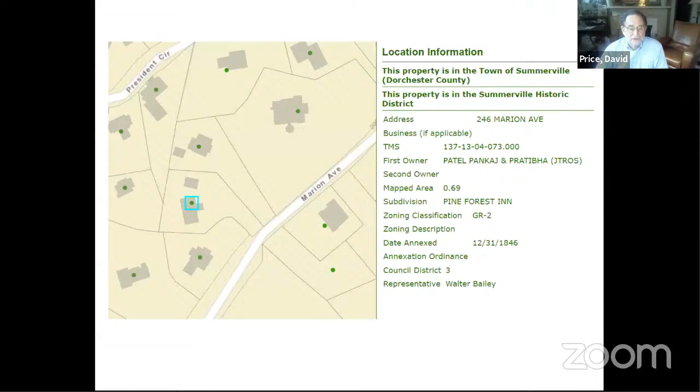All right, the first project is 246 Marion Avenue. We have someone here to make a presentation on that proposal. Yes sir, my name is Mike Taylor. I'm representing the Patels with this project.

Go ahead and tell us about the project, please. Okay, we've got an existing house off of Marion Avenue and we're looking to build an addition off the back.

One part of the addition is going to extend their dining room, and there's going to be a sunroom that'll extend off the back of that. So that's kind of the inside of it.

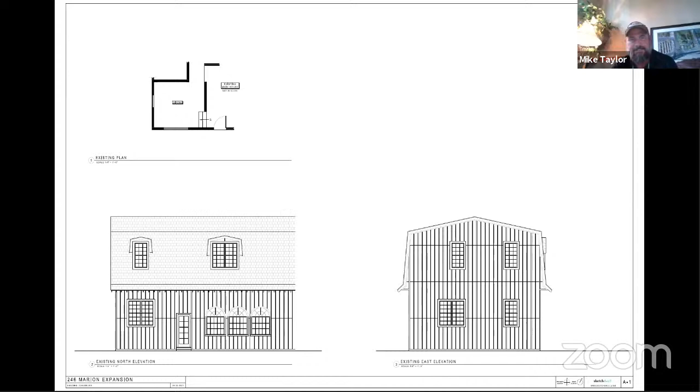The outside is going to match the house with the board and batten. It's just pine board that has been sealed, not painted. There'll be quite a few windows in the sunroom, but they're going to match the existing house, which are vinyl windows. The eaves and everything we're going to match with the exposed rafter tails.

And we have a deck going on there as well. We were looking to do some cable railing around the deck. It was going to be an Ipe deck, and then we were going to also wrap the columns with the Ipe as well.

So the roof, we're going to match the existing roof, so really it should look like it's always been there.

As far as being able to see this, it sits really, really far off the road. I don't know if there was an included plat of the property, but this is at the very back, and it sits way off the road. There's a long driveway. So it really can't be seen from the street at all with the positioning of the house and the garage.

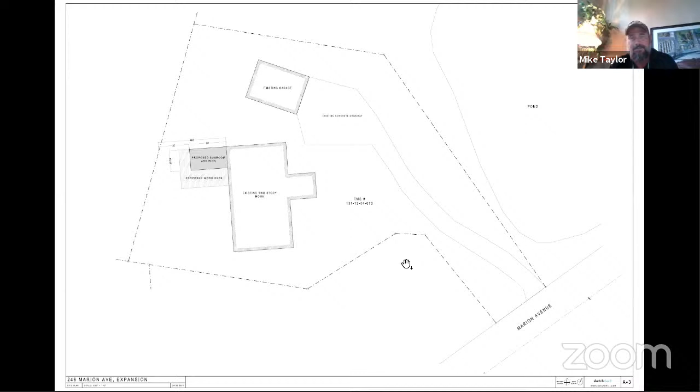I was at the BZA meeting yesterday, and we were granted the variance for the encroachment onto the rear setback, so we do have the approval for that. So other than that, it should look exactly like the house when complete.

No problem, but yeah, it's going to tie in right there on the side you're looking at. It's going to come right off of those eaves off the back, and that board and batten look that we've got right there. The spacing and everything's going to be the same. The trim around the windows are going to match what they've got. And really that wood comes all the way down to the ground, so there's no real foundation of sorts that'll be block or stucco or brick or anything. So it's going to look exactly like what we've got there.

Comments? Go ahead, I'm fine with this. I think since it's gonna look the same, use the same materials, and especially since it can't be seen from the road, I move that we approve it. I'll second that. Rachel? Yeah, I second it. Do we have any further discussion? Looks good. All right, Nancy Jean, I approve. Jeff, yes. Rachel, yes. Tim, yes. I also. All right, on to the next project.

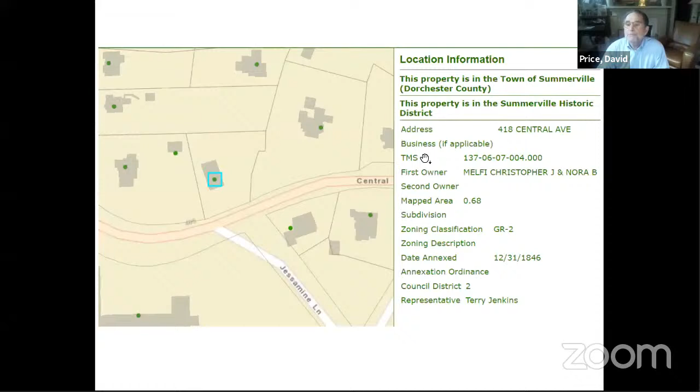What would you like me to start? Yeah, you do not look like Cindy, though. No, nothing like Cindy. She sent me this link and I opened it up. I hope I'm not keeping Cindy out. Cindy is our contractor, she actually works for our contractor. But I think that you have everything that I've actually put together for this little project, so I feel like I can talk to you about this, I should know enough. Would that be okay? Yes, please.

Okay, so what we're trying to do is on the second story at 418, it's on the north side. It looks like at one time there may have been a door there. I'm just guessing, but what they have now are like 3 windows that have been sort of cobbled together to fill that space, and there's another window right beside it. I sent some pictures and drawings, I don't know if you're able to see them. Yeah, I'm looking at it right now.

So we just want to take those out, put siding, just exactly what we're looking at, the siding that's in there, and just button it up so that we'll have 2 windows on that side of the house instead of a door and a window there. Does that make sense?

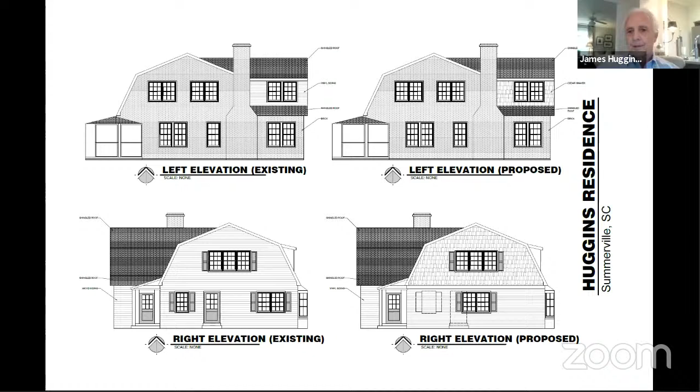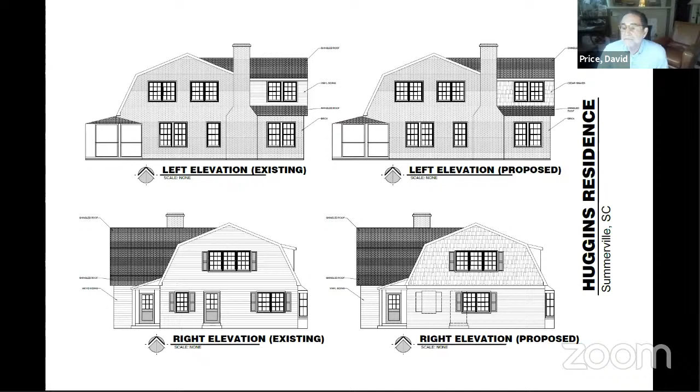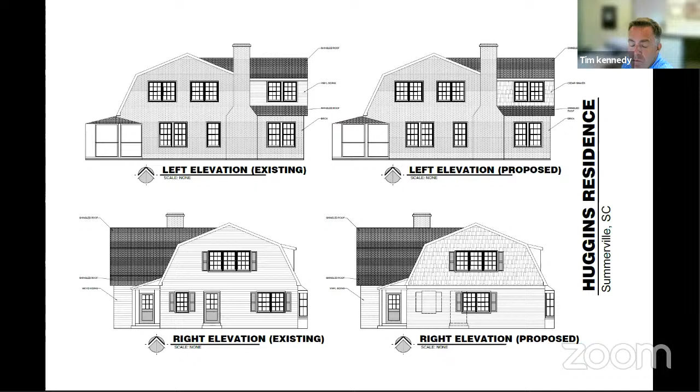I'll second. All right, Nancy Jean, I approve. Jeff, yes. Rachel, yep. Tim, yes. And David, yes. Thank you, everyone. Good luck, James. Approved. Thank you.

Next project is 608 Central Avenue. Yes, sir.

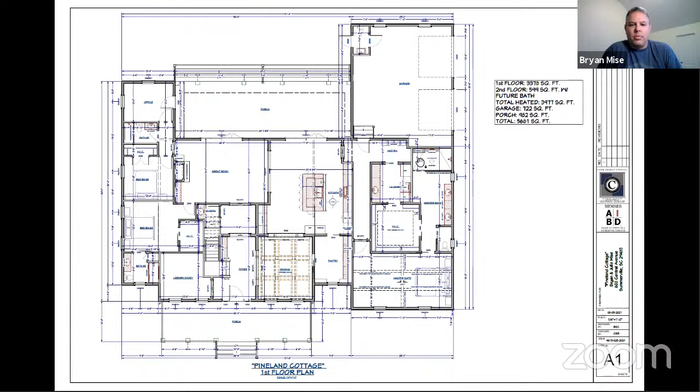I'm Bryan Mise, and I was before the board previously in February, and you guys had approved the previous plan as drawn. However, my wife and I were not quite happy with the details, as much as it was really good and we thought it was what we wanted, but we ended up consulting with a historic builder consultant who does major work on historic houses across the country. Like I mentioned in the previous meeting in February, we're trying to make this look like a 100-year-old house, and he said here's some details you need to fix. So we went back and fixed them to be more historically correct with the time period we're trying to build in, which is the early 1900s, 1920-ish style. So I can go through those changes if you'd like.

That would be great. Okay, so really the main thing that changed is the front elevation. I know one of the biggest things, if you remember our discussion in February, we had a roll lock detail across the brick foundation veneer. It was shown on the front elevation but not around the rest of the house, and now we've actually removed it completely because you guys wanted me to add the roll lock around the rest of the house.

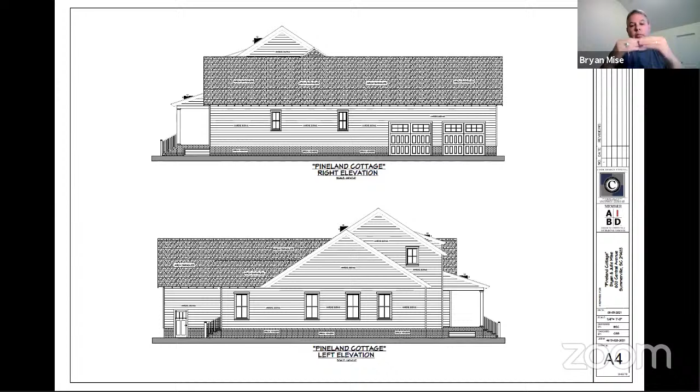Are there any other elevations we're looking at on this? I think she has the left and right side as well, but it's mostly the same, nothing changed. Actually, on this left-hand elevation we did raise the whole profile of the house by 2 feet, to accommodate putting a window in that little section, since that room on the half story would be considered livable space and needed an egress window. Plus the way we're running HVAC between the first and second floor, we're using an open web floor truss system, so that raised the profile some - it all worked in together. That's the only change you'd really see there.

Are there any other comments? Bryan, did we talk about the windows last time - what they're going to be and the details on that?

I think you had volunteered - I'm still probably going to take you up on that, come back and do a demo at your house with the Marvin windows. Sure, yeah, I love them - they're expensive, but they're great windows.

So we're looking at using the Marvin Ultimate double hung windows, still 2/2 with simulated divided light. Nice, they're great windows - if you want to come by and look at them, they're really nice. They'll be beautiful in your home.

I think so too. Let me share a little secret with you guys - hopefully this doesn't make any waves, but our project has actually been selected by Fine Homebuilding Magazine as their house for 2022 as well. Oh, so cool, wow - that's another reason why I'm wanting to make sure I get this right, for the whole world to see. That's great, congratulations, that'll be great.

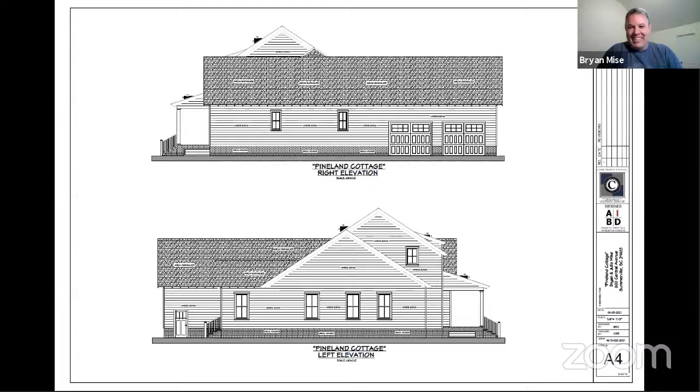So, any other comments? I can't wait to see it. Me too - yeah, we have a motion.

I'll make a motion that we approve the design as submitted, with the exception of the front porch, where we're looking to have brick piers with a band at the depth of the deck framing. And Becca, can we have you review that and look at that before it goes to construction? Sure.

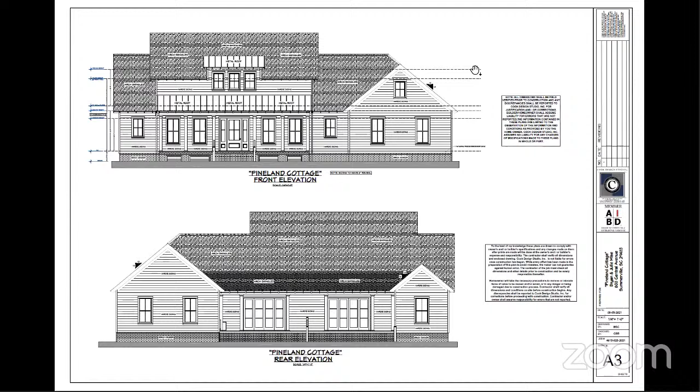I review the plans before the permit is issued. I take the plans and compare them to what's been submitted, so I'll make sure that happens. Nobody sneaks anything in there on you, huh? No, we don't let that happen.

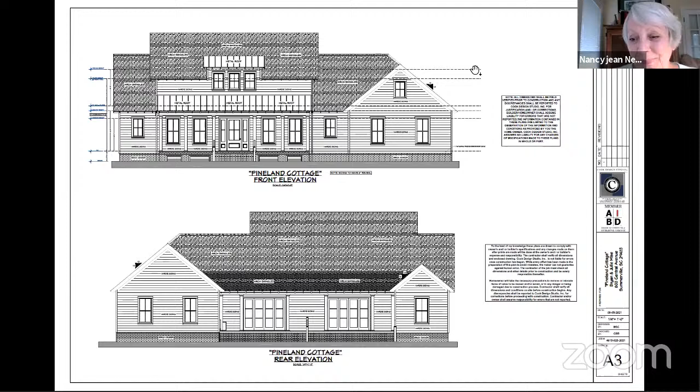Well, lucky for you, I'm crippled right now, so I won't be finding anyone. That's good. Looks like an exciting project, and I'm glad we have knowledgeable people here that can talk about the specifics to make sure you address it to the right era. I think it's a neat project.

Thank you. Good luck, I think it'll be great. We have a motion from Rachel. Did we get a second? I'll second. Nancy Jean, yes. Rachel, yes. Tim, yes. What happened to Jeff? He's here. All right, there you are. Yes. David, yes. Okay, thank you.

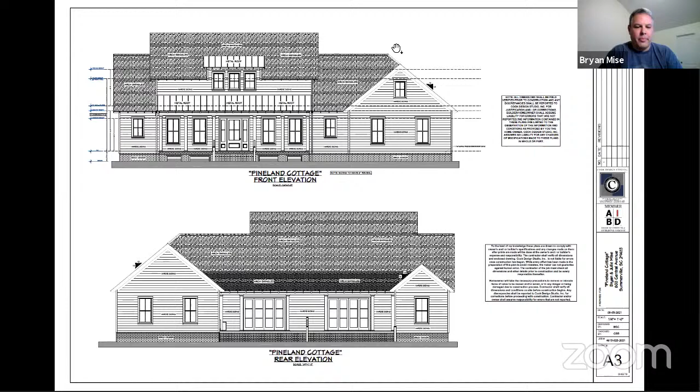All right. 215 West 2nd South Street.

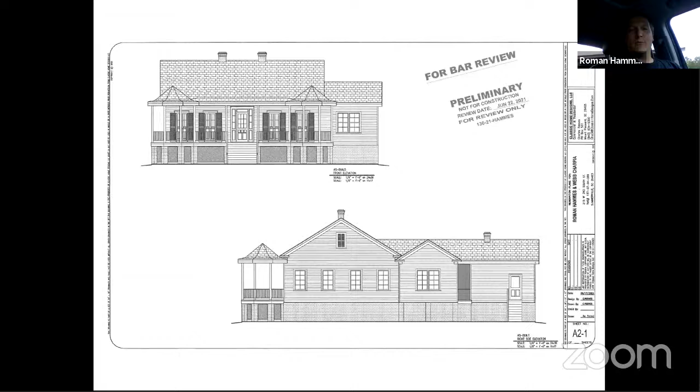Hey, how you doing? My name's Roman Hammes. I appreciate y'all entertaining me on this. Webb Charpia and I have a law practice. We bought the building a few years ago. It's an old house, we converted it into a law office. It's across the street from St. Luke's. We're kind of the only house facing that street in that particular section. We've got an issue.

It's one of these old houses that's effectively 3 stories tall, but it's a 1-story building. Very tall crawl space, and then there's this massive attic upstairs that I had a contractor go into. He told me you could probably get 1,200 square feet out of this for additional office space. We talked about putting in an elevator or an interior stairwell, but that eats up so much space, or becomes cost prohibitive. It doesn't make sense. So we wanted to float the idea past y'all of putting in an exterior staircase.

I submitted the plans. If y'all say it's okay, we'd move forward. It'd have a couple of landings on the way up, about 4 feet wide. If you look at the pictures of the building, it would stick out as far as this back room that sticks out on the far right, which I think was an addition at some point. It would stick out as far as that, going towards these trees over here. Then the bottom of the stairwell would run down equal with this gazebo front porch thing on the left. Anyway, that's the concept. Wanted to run it past y'all to see what the appetite was before I spent too much money on this.

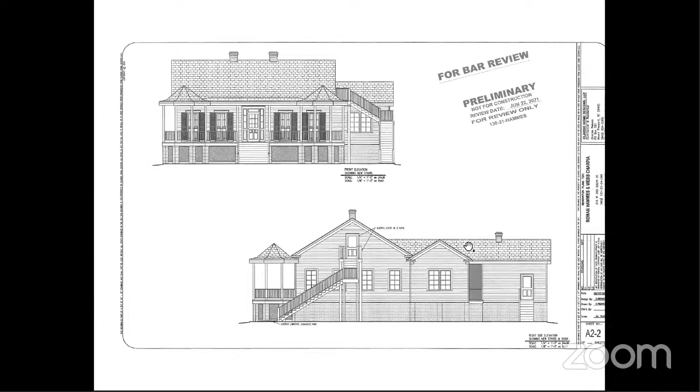So Becca, is this a most historic house? Is this rated 1? Yes, it is. Thank you, David. Okay, Roman, I'll just start. I'd say I'd have a hard time supporting this because of the historic nature of the house. I don't think it's in keeping with Summerville or what we're trying to achieve with those houses.

Y'all don't like stairwells in the front yard? I mean, is that... No, not really. This house, the building is really, really lovely, has beautiful details, and this is about as mean and utilitarian and unhistoric as you could possibly create. It just doesn't have any sense of proportion or style or detailing that could even make it possible for us to consider and say let's talk.

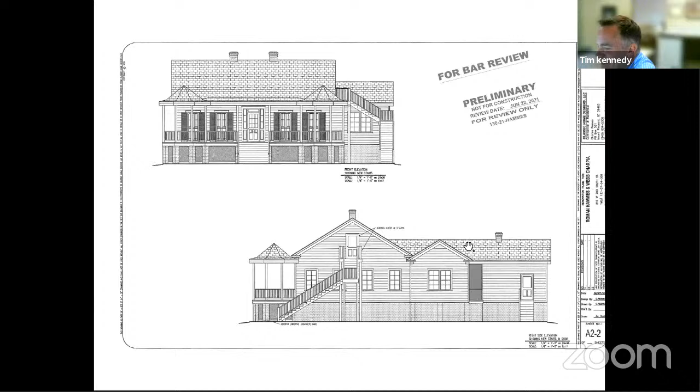I'd say this is the reason the BAR was created. All right, listen, y'all are killing me here. Come on, there's nicer ways to let somebody down than this. No, I don't think so, not on this one, Roman. This was historic. Appreciate it, guys. Y'all have a nice day. All right, thank you. Bye-bye.

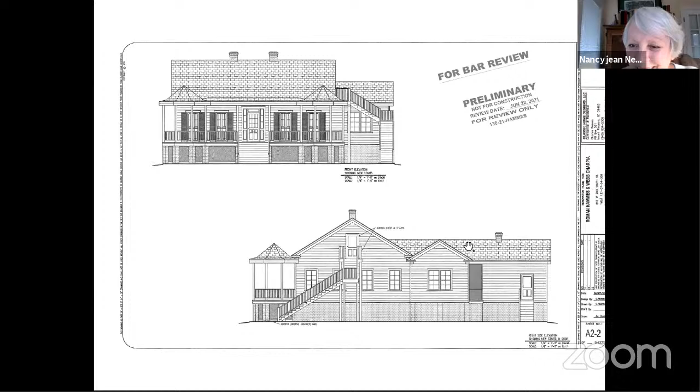Next. Did we need to take a vote on that? No.

That building is just so lovely. It is, it's beautiful. Well, yeah.

Now we're at 107 Briarwood Lane.

Hello, my name is Caroline Leland. We just recently bought this home, and my mom is here, this is Laura Jones, some of you may know.

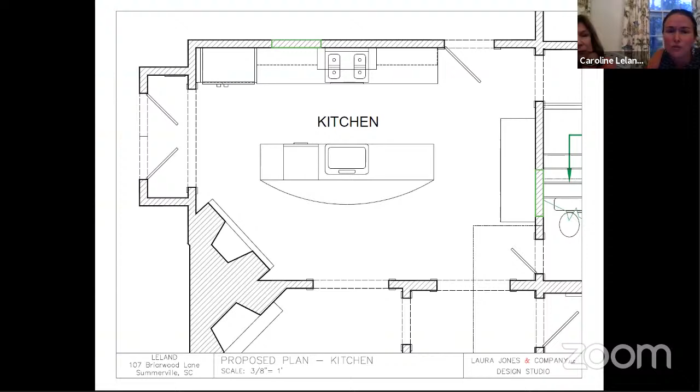We found two original columns in the garage that is not on our property anymore, it's owned by somebody else now. But anyway, the columns, we wanted to add two columns to that little roof stick out and complete the look there and bring it back to more of its original character.

Well, how fantastic that you found the existing columns, and that they were in somebody's shed. That is just really, really great news. Yes, we were excited about that. We found some shutters too, one of them needs a little bit of work, but they've got layers and layers of paint on them. Yeah, yeah, yeah, tell it.

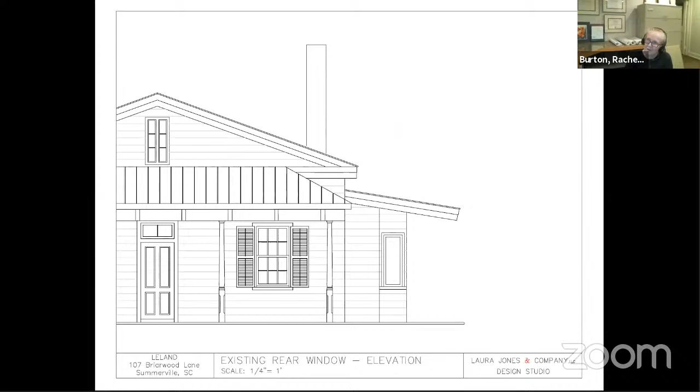Anyway, great, well, I love what you're trying to do. My only comments would really be, you're putting in new French doors and the close-up windows, I guess I see all these, it's a very simple frame, isn't it? Just a thick windowsill basically wrapped around with just a little trim at the top. Yeah, there you go. I would really just say, although the trim is really simple, that is your trim, and that you match the trim.

And can you tell me about the doors you're going to pick? What are they? I think I included just kind of a general image, but I kind of like the 2/3 with a quarter panel at the bottom. We haven't picked any specific ones. But are they wood? What will they be made of and what will they look like? I'm not sure, I defer to the professionals on that.

Do you want us to give a provisional approval or conceptual approval at this point and come back with materials? We can do that. Yes, that would be good.

There's one more thing on this that they had me add in. It's the window on the back of the house that's in the kitchen. We're just going to shutter it, so the shutters will just be closed, it'll look like there's still a window, but we need the space on the inside for the kitchen. So I am totally fine with that. I think it's a great solution to keep the look of where there used to be a window, keep the trim there, the siding there, and just close the shutters and fill it in on the inside. That would be a really good solution.

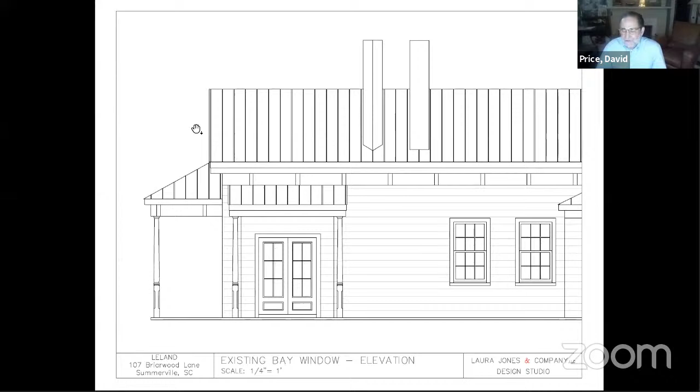Agreed, that roof overhang is crazy. It's so crazy. And then the picture framing of the trim around the window.

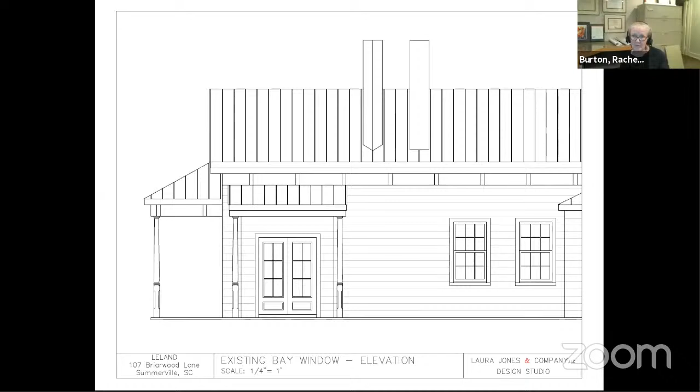I don't know, I mean, you can see on this particular elevation the existing windows are at one height, and I'm assuming all the windows are at that height. It would probably be most beautiful for your home on the interior if your new doors match that height, if it's possible. I don't know, I need to look.

The ceiling is lower there. Oh, is it? Yes, ma'am. I could, yes, let me go glance at it.

I guess in the end, as long as it looks nice in the room, that's one piece of the decision. You've drawn an 8-foot door? No, ma'am. I'm saying an 8-foot door would be a better look. I don't honestly know if it should be 8 feet.

All I'm noting is that on your elevations, you've got a height for the existing windows, and we frequently try to match the height of existing windows where we can, because it makes the whole interior look cohesive. It feels nice on the interior, but it also looks really beautiful on the outside when you do that.

So perhaps you could just verify, is the ceiling in that room lower? Do you have to make it lower to fit? And just verify what is the size and height of the door you want, and what is the material of the door?

Actually, the line drawing, if we go to it, makes the windows look higher than they actually are. It could be that it's a drawing piece and not a real life thing. But if you could just confirm that.

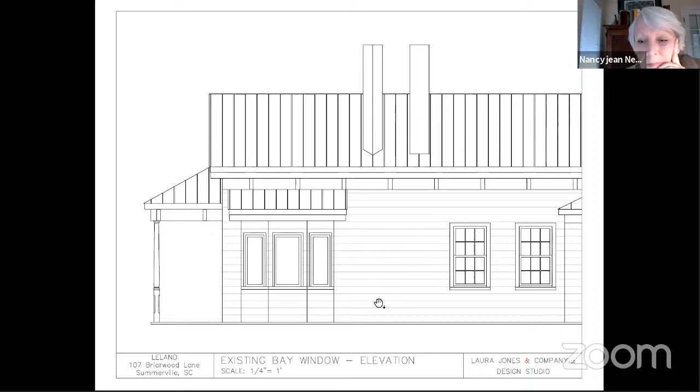I think we're all in agreement that we like the concept. And just remember, y'all don't vote if it's just conceptual approval. You'll vote when they come back. Correct.

Do we need to give some direction for them to come back for staff approval, or do we want them to come before us? That's up to y'all. That question was to the board, not to you. Just making sure.

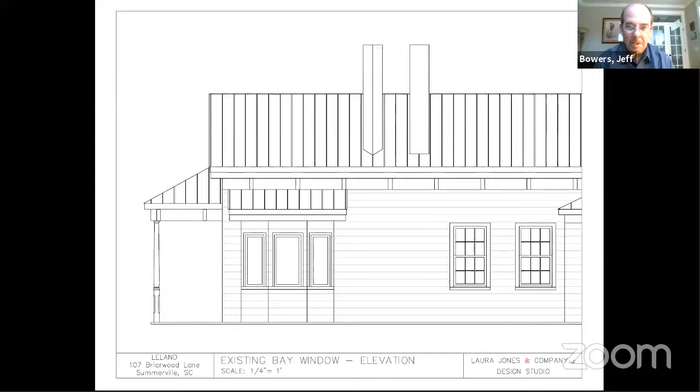As long as we feel like Becca can approve the door material and the look of the door, then she could do it. Otherwise, it needs to come back to us. If Becca doesn't feel comfortable with what she's presented, then she would come back to us as a board to get it approved.

That'd be fine with me. I think if these guys present a quality Andersen Marvin kind of door that has simulated divided lights and the correct trim, that's good. What we don't want is a fiberglass door unit that has a fiberglass snap-in grid with plastic around it and little button caps. That's what we're trying to avoid, Becca. 10-4, okay.

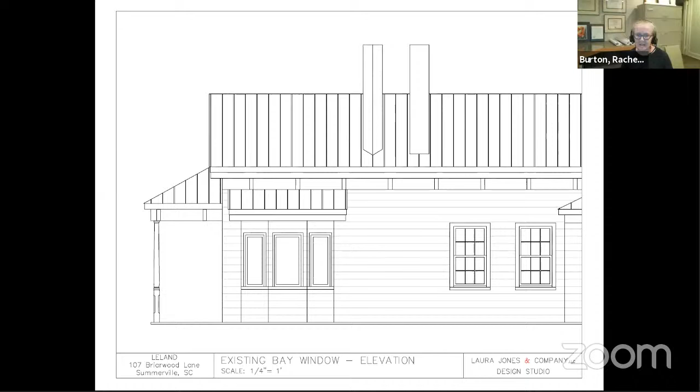So then do we want to make a motion to approve subject to staff approval on that product? That sounds logical. Okay, then I make a motion that we approve the design subject to staff approval of the door to meet the criteria as Tim just defined.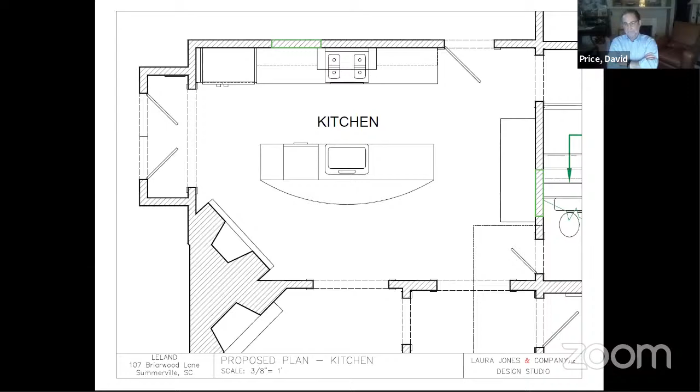I have a second. Second. All right. Jean, approve. Rachel, approved. Tim, yes. Jeff, yes. David, yes. Great.

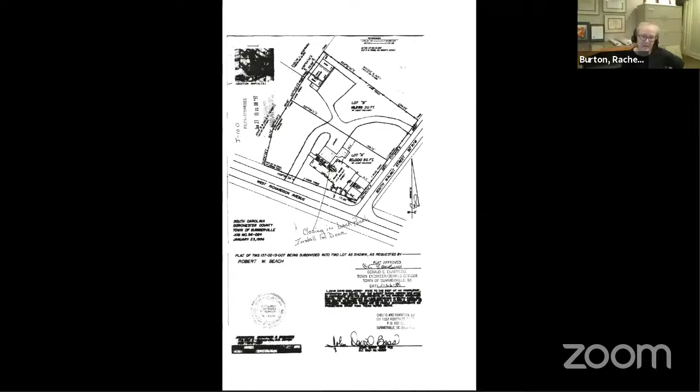All right, thank you. Next project is 114 South Walnut Street. Becca, could you summarize what your conclusion was before we start again?

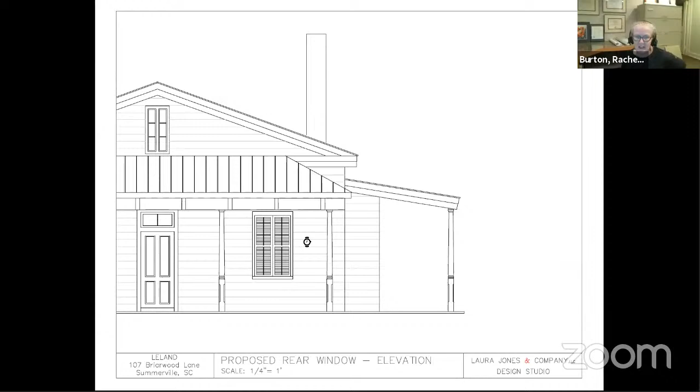Yeah, sure, let me get the pictures in front of me. So they're going to need to resubmit. No wait, sorry, I'm confusing you. Oh, like when you're presenting the new project, like you showed us the front, and although I read them all, it's really helpful if after the guideline criteria you do a little conclusion. Oh okay, can you just summarize what your conclusion is before they do their presentation so we know? Yeah, or I'm reminded again.

Yeah, no problem, so this one's actually fairly simple. The reason I couldn't approve it at a staff level is they were not doing a repair in kind, and they were enclosing an open porch on this house. This is also a number 2 house, so I didn't feel comfortable making that decision. The area of work is not visible from the right of way, but I couldn't verify if the window and porch were original to the home from our files, from the SHPO surveys. But I do think it was likely that it was already part of the original home. So, okay, that is all I have to say about that.

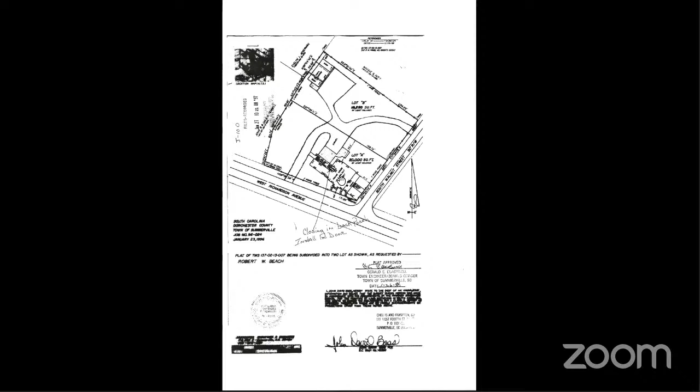We should have someone here, but I'm looking and I do not see anyone for this project. We'll move to the next and come back if they show. Sure, yeah, let's do that. All righty.

So, okay, 105 Hansberry Lane - they received their variance that I mentioned in the evaluation last night, and it will have to go before the tree protection board. I'll be involved in being updated on those decisions, so if anything should change that affects the design we discussed today, it'll come back. But with new single family construction, I don't really do too much of an evaluation to remain impartial. Other than just the standard guidelines, it appears to me that it follows them generally. So, I'll hand it over to either Heath or Sam on the project.

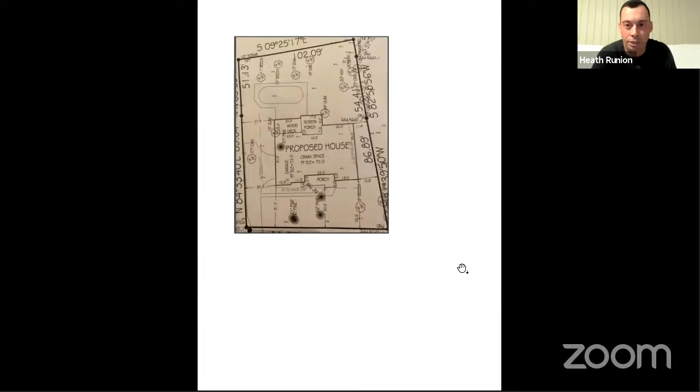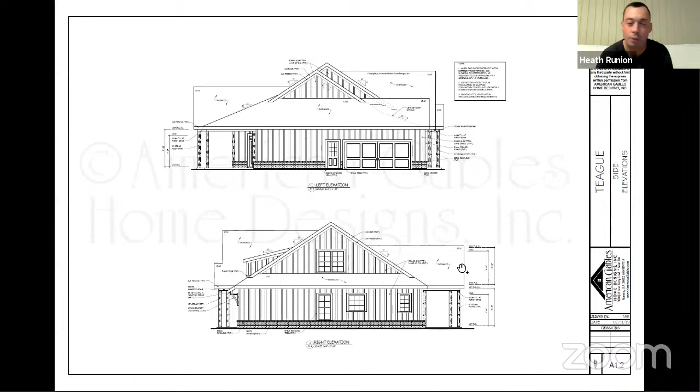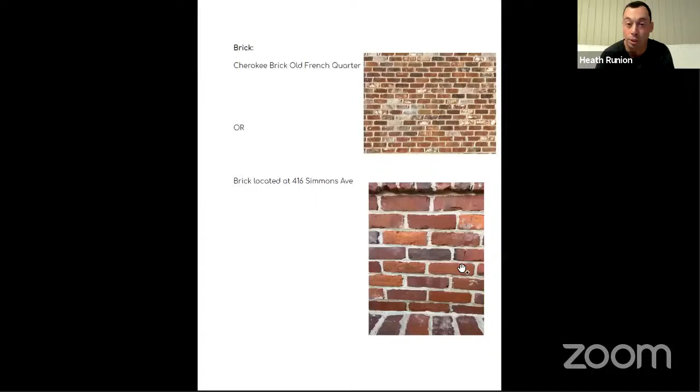Yeah, so I'll go ahead and speak. Me and my wife Kendall are the fortunate owners of 105 Hansberry Lane that we purchased earlier this year. I also have my builder on in case you have any specific questions. But we're very thankful to be in the area - I've lived in the area, I lived on Peter Street, and I recently sold my house to be able to build this one. So we understand how special the historic area is, and I'm very appreciative that I'm going to have the opportunity to build here.

Becca, if you can go back to that picture - just to start, that's kind of a picture of that. Those aren't the exact colors, as I put in the description, the brick, roof and exterior colors are ones that I've submitted today in the plan, but I wanted to provide a picture to show kind of what the house will look like. I do plan to go with board and batten, I'll be going with a metal standing seam, 1 inch high metal roof, and then we have cedar - the accent will be cedar. And then it will be a raised slab is what we'll be building the house on. But yeah, just real thankful, appreciative to be in the area.

Do we have any questions? Any comments?

Well, I guess I'll start. Just looking at those elevations, I guess Heath, this is a tough one because I do appreciate the fact that you guys are trying to build a nice house there. But I'm a little bit worried that it's not in keeping with the historic district of where your lot's located. Maybe my other board members don't feel this way, but the exposed cedar, the detail at the bottom, the slab on grade - those are all features that typically we don't see in the historic district. And I'm even a little bit worried about the garage being all part of the house - most houses in that area have a detached garage. So I don't know, I'll let other people speak, but those are just my initial concerns, I guess.

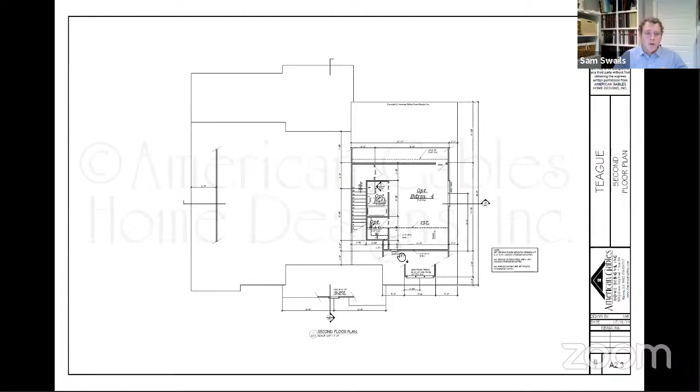How high will it be raised? 24 to 26 inches typically is what he was planning on. He doesn't want to elevate it too much because he would love to retire in this home, and the less stairs, the better. But it's definitely not going to be a slab on grade—it's going to be raised.

I think we've got a couple of other things going on, because some elevations show windows with divided lights, some show windows without divided lights. The brick coursing is different, as Rachel pointed out—some should go below the window, some show a table course. So I think we might just have to get these cleaned up and resubmitted to reflect what you guys actually want to build, versus four different variations.

My thoughts about this are that, on the one hand, I really appreciate that the selection of this design is trying to break up the mass and create the kind of massing that is appropriate for our historic district. So I really like that—it got off to a good start.

But I do agree with picking up on David's comment that the exposed truss decoration, applied inside a very narrow overhang of a gable roof at the gable ends, gives it a sort of mountain house look—not necessarily our historic district look.

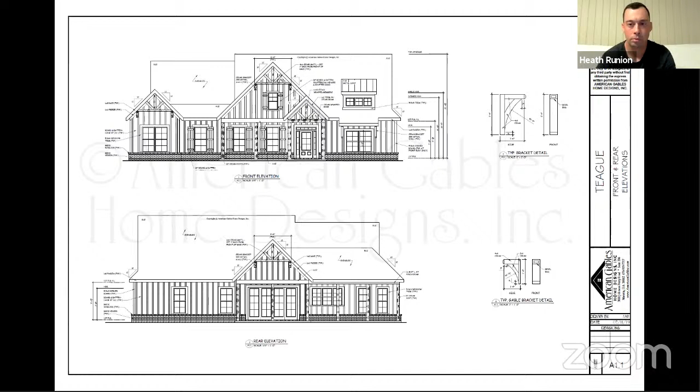Even using the corbels that exist beneath the applied timber frame—if you were to use corbels instead of the applied timber framing, that could be more appropriate than exposed timber framing, which isn't truly structural, just applied decoration.

There might be smooth boards that are painted versus cedar that's stained—I don't know. I think it's just some of the material selections which might not be perfectly right. Maybe it's just looking at how we have some homes in our historic district that have really simple porches, but they aren't raw wood.

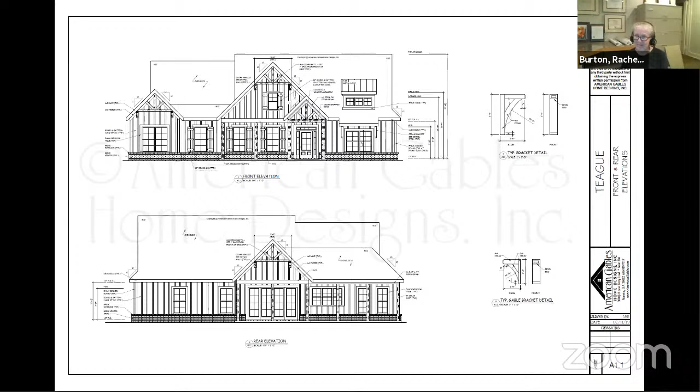They're not just meant to be a wood post. There's... yeah, so I don't know, those are just my thoughts. And I actually, David, I agree with you about the corbels - they could be fine as a piece just on their own.

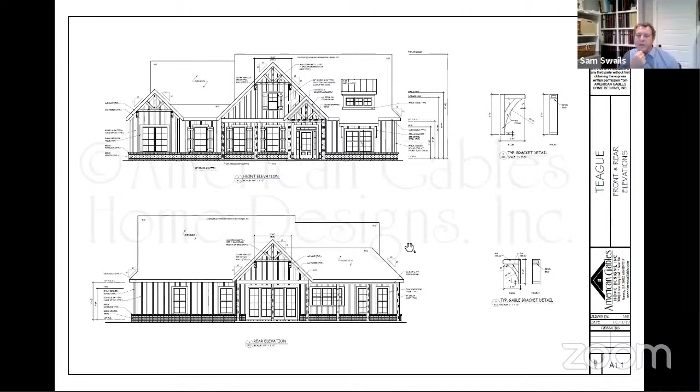Becca, do you have the other plan elevation? Which sheet? I'll tell you, if you keep going, it's not part of the American Gables, it's by the engineer, Kevin Gatton. This is everything I have.

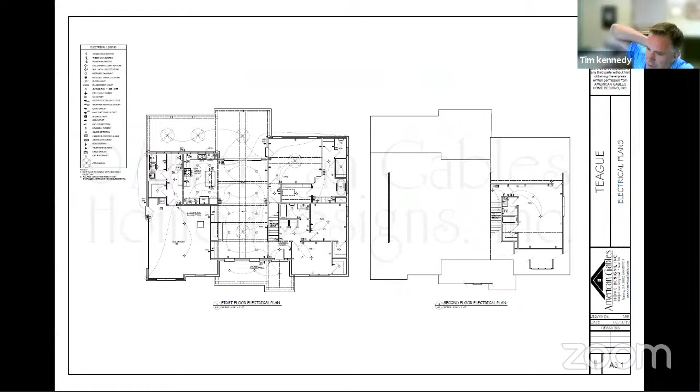Okay, so y'all are missing the engineered elevations on this plan. Not sure, I think go back the other way, Becca. I think they're in there with green lines showing the vertical board and batten. I've got it pulled up on another screen. There you go, yeah, yeah.

This just gives you a little bit better of what the final look was, because the windows don't go down all the way since it's not a slab on grade anymore. This just helps give you more visual. Now if you look to the side of this house, there's your visual without any of the decorative trim. Is that something you guys are looking at?

That Sam, I think she just got to combine all this together. The green lines and the engineering - you need to get an architect to put it all together for you and make it look right. These are showing windows with no grids, the others had grids. What are we looking at? It's just kind of half put together, Sam, to be quite honest, and it just needs to be done.

No, I understand clearly, we were discussing the architect. Of course it's not required to have an architectural drawing, but of course it paints a very pretty picture when you have one.

We understand that, but we were just trying to get Heath down the road because a lot of the things we're talking about are very simple. He wants 2/2 windows, that's simple. He's got a metal standing seam roof, board and batten siding - we're talking about simple things. That is what y'all are looking for, but y'all want to see it. We just got to see it put together to make sure the proportions are right, the details are right.

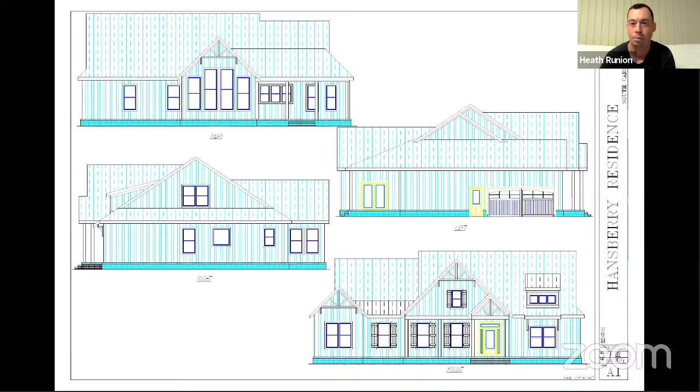Could you give me examples, besides the selection of shutters? Shutters, trusses, the porch columns, the colors chosen, the board and batten everywhere, the garage doors - yeah, there's a lot of things on there.

So I think you need to look at it in a holistic way and then come back and show us what you're thinking.

I think you set Heath off on the right path, and I'm going to help him get with the architect and get things figured out to paint the picture. He's definitely going to build a house that fits what y'all are all describing, it's just a matter of having it on paper. This was just an engineer drawing to get something for you guys to look at. Right, and he'll get that together and bring it back, and we appreciate your comments on it.

And Sam, just while you're thinking about it, one of the things that we've always had a problem with too is your wall section.

When you have that brick detail at the bottom, we talked about this on an earlier submission, and you've got it proud of the siding. In a historic house, it shouldn't be proud of the siding. Now that's one of the issues with slab on grade construction versus crawl space construction, so you might need to get creative on how to figure out that detail as well. Just take a look at those.

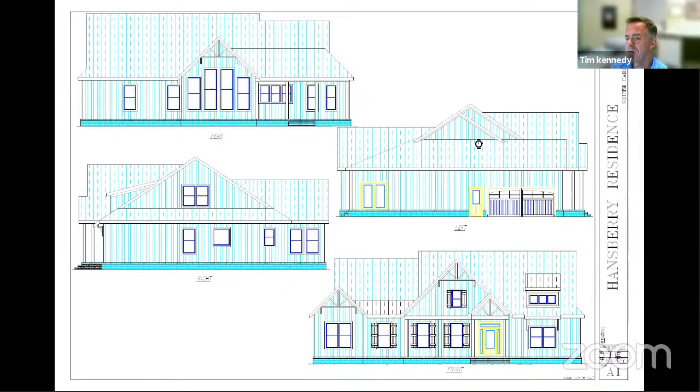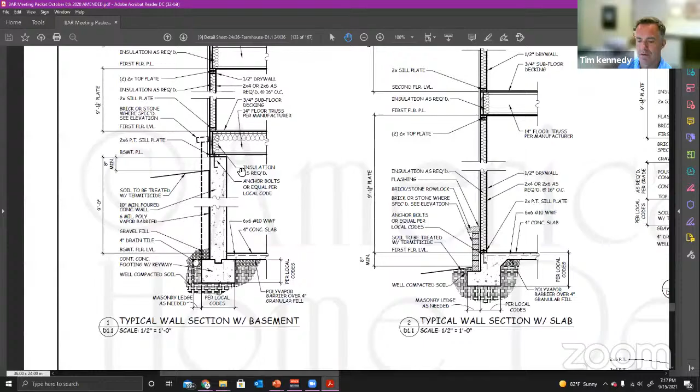Yeah, I think there's a wall section in one of these things. Maybe you could go to that and get Rachel to kind of talk about that a little bit. Let her see that detail real quick. If you could blow up one of those, go back now, go into section 2, zoom into section 2.

Yeah, you see that's the detail we're talking about. That's a really, really terrible detail. But even that may not be accurate, because you're talking about a raised slab, perhaps 2 feet. So the amount that you raise it, like when you have the brick up against your wood siding, that isn't what you're really going to do.

You're correct, this was the purchase plan from the website. This is not what he's building, but that in our climate is going to be awful. That is going to rot. You just can't build it well enough for it not to. So I would encourage you, start with what your detail is, look at the proportions of what you're going to have on the outside, like how much brick will be exposed, which will determine how high you raise it, and then really think it through.

And then is there a band board that finishes off the board and batten so that the battens all hit a horizontal board? And then what is the height of that board if that's the detail you pick? And how does it look? It all comes down to how does it look, what are the proportions, does it seem right? And we can't just advise you, oh, we'll just make it this height, because it all fits together in an overall appearance.

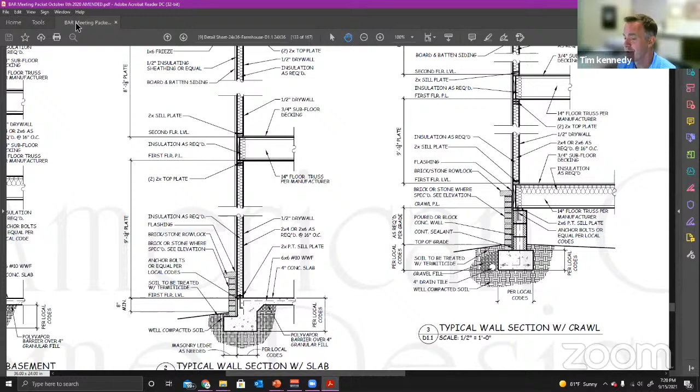And Sam, typically about 2.5 to 3 feet is what we've asked these houses to be. So obviously you guys come back with what you want to present, but that's typically what we've asked for when we've seen a slab on grade house or a crawl space house. So 2 to 3 feet, two and a half feet something. Yeah, 2.5. Good to know that now, that's why I'm throwing that out there to you. Thank you.

Well, Heath, you got anything else? No, I'm good. I appreciate y'all's time.

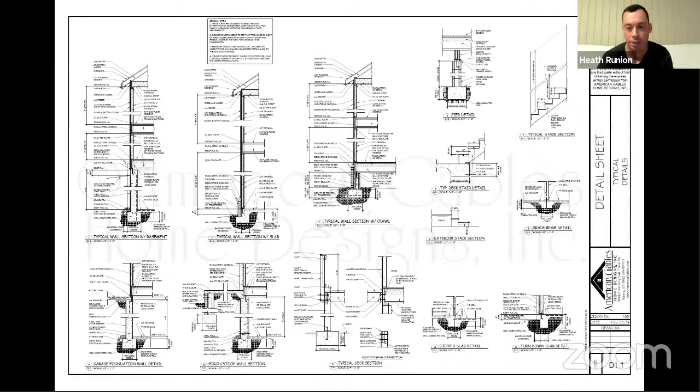Hey, sorry about that, I know it seems like a lot. It seems like we just rained all over your parade, I'm so sorry. Yeah, it makes it awkward for us too. No, I'm just excited, I'm looking forward to it, obviously we sold our house and we're looking forward to get going. It's just me and my wife now. We want it to be a success for you and for the town.

Yes, sir, exactly. I appreciate that. So, like I said, we really are appreciative.

I know how Heath has had to go through the triathlon of boards. He's been before BZA hoping twice, then before the tree committee. I had my zoning meeting last night. I was talking to Sam earlier, I said, Sam, we're going for back-to-back wins, one for one a week. We'll call tonight a draw.

All right, is there any other feedback you all might have? Because I would like the next time I meet with you all to hopefully have everything approved where I can get moving with building. Is there any other specifics you might have that I can make sure to address?

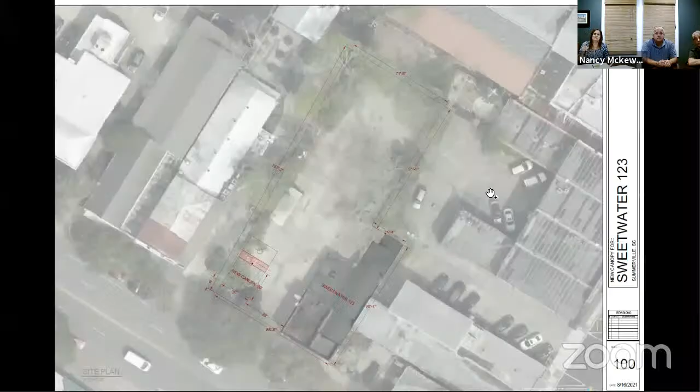So what we have, if you go back - we have the building there, and on the left-hand side is the new canopy. Just wanted to show this picture with the driveway. Basically what we have right now with the temporary canopy is the same footprint we want for the new one. It will not restrict the driveway in any way. The ADA handicap parking spot and walkway is still not being changed, and the walkway from the restaurant to the dining area will be there.

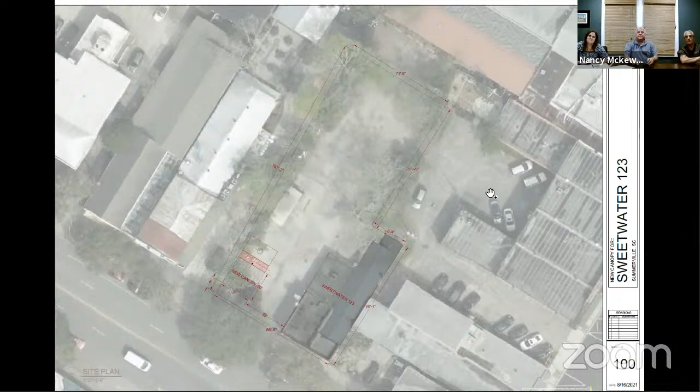I'll show you the next slide. Okay, so what we're showing here is what was approved back in 2019 when Sweetwater had their new turnover from the Greek restaurant. This outside patio was put together with horizontal slat boards, and the tall fence in the back shielded where the cooler is, which was painted black and fits really well in that back corner. This is their main entrance to the restaurant.

So this is a street view, taken about a month ago or so, and you can see where they have the temporary canopy right there. That's a 20 by 20 structure, and like I said, it does not get in the way of the driveway at all. It does take up some parking spots, but those are just regular spots, which they have plenty of in the back.

The next slide is an artist's impression, so it's not exact, but pretty much to scale, showing what they'd like to see: a more permanent covered dining area. People have really been enjoying outside dining more than ever in the last year and a half, and it's worked out great. It's next to another busy restaurant, so they coincide together very well with this outside feature. We want to style it just like what's in the back, which you'll see in the next couple slides, and the next slide is that feature.

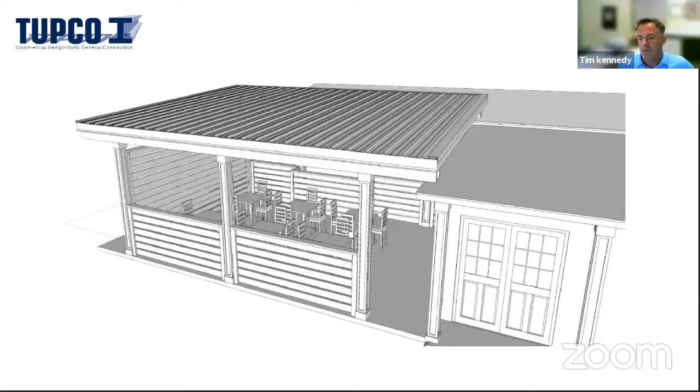We want that roof to come over. Yeah, and we can't get it lower because that's so low. And then that way we can carry it up, not in a great slope. I mean, we're just going to keep it coming. Now, that roof's going to be a very low slope. You're not going to see that thing.

And Edward, I'm assuming you can't slope it the other way - you can't let the entrance side be the high side. You could, but what would happen is because of that back where it hangs over, we would have to make this front higher to do that. And structurally wise, it doesn't affect anything, right? Yeah, it's just these two roofs coming together.

It was just kind of odd to force it that way. I know when you look at the other one in the front, you're seeing the high side. I may be missing the reasoning - maybe I'm just missing it because I don't have the whole view here.

Well, the reason is if you look at the lower roof to the right of it, as you go in the main door, right? So if we reverse the slope and get this side higher, we're going to hit the slope on that roof right there. See how we're hanging it over, over top of the roof?

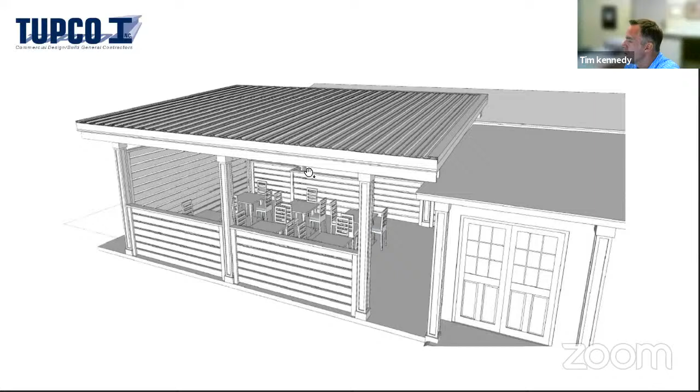So if you go the other way, what is the high side now on this drawing is going to hit the slope of that roof of this building. As you see this little piece you're looking at on the door, where the door is, that's basically a lean-to to the bigger building toward the back. It's going to dive into that roof unless we make this side here a lot higher. I see, so there's a higher roof, a higher building back here. There is. I see, that's what I was missing.

Yeah, I agree with what you're saying. And you know, you get there and you want to do it one way, but then you kind of look at what's there and it kind of forces your hand. Messes you up. I gotcha.

Yeah, that is really too bad for two reasons though. One is, we get hard rains and you're going to get soaked as you try and run under that. Well, we're going to gutter it, Rachel. Yeah, but I know that's a solution, but it's clunky - it's not a nice, elegant solution. So that's one of my concerns, I'm sorry about that, but more than that, I just think that when you approach, just like on the front pavilion, you have it facing so the high side's on the street.

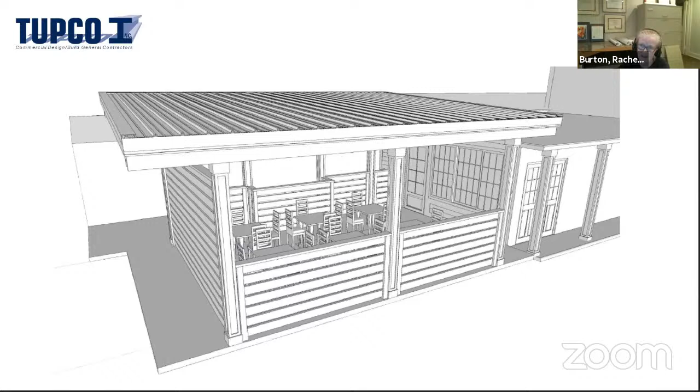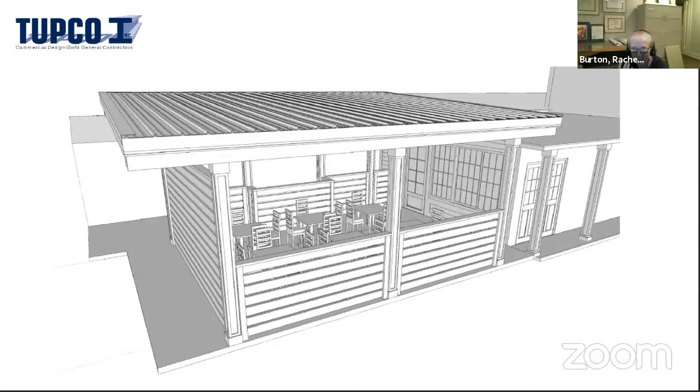What you get is that gorgeous color of the ceiling showing, and it makes it much more interesting and a great feature to add to the streetscape. You miss that if this slopes this way, you don't see that color of the ceiling as part of the architectural design.

Now we can reverse it, which goes back to that, and then you can see that just looks amazing. The only thing is you're going to be clunky when you come to these two roofs.

What I want to do with the low side, say we do it like this. I got to get that low side just a little bit higher so I don't have a conflict. Well, we can do that. So if that's the only thing you don't like, we can reverse it.

I got a question. Why couldn't you make the right-hand side in this picture the high side and have this thing slope off and dump everything into the space by the cooler? Yeah, you could, but you're not getting the same feature. We could, I'm just saying that would keep it from pouring onto the people entering the building.

We'll take care of the water as far as the people, yes we can do that. I don't know if you would get as much appeal that way. Now that's something for y'all. I think you'll lose your appeal going that way. I agree.

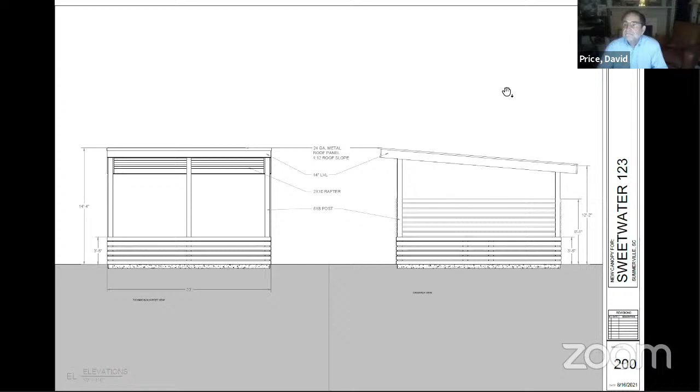Okay, you have a second? Second. Okay. Rachel, yep. Tim, yes. Jeff, yes. Nancy Jean, yes. And David, yes.

All right, I'll send the approval for the back porch tomorrow, and then I'll just wait to hear from you, Nancy, with the updated drawing for this one. Great, thank you, Becca, that's easy enough. We'll make some changes and more notes and more details, and please look at it, and we'll get it done.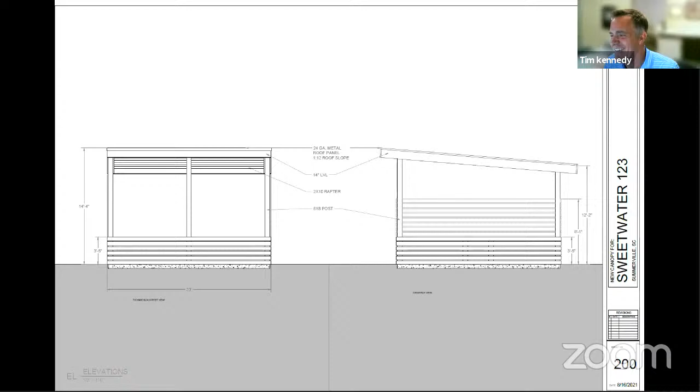Thank y'all. All right. Denver, thank you. Thank you, we're trusting you, man. Don't let us down. No. We let you down? Hey, we let you. Y'all have to look at it. We'll make sure. But thank you, and it's gonna look good. We're ready to eat. So. All right. Yeah, bye guys. All right, thank you very much.

Thanks. Yep, bye-bye. I don't think the folks have hopped on for this enclosure of the Blue House porch. Let me see the name just to make sure.

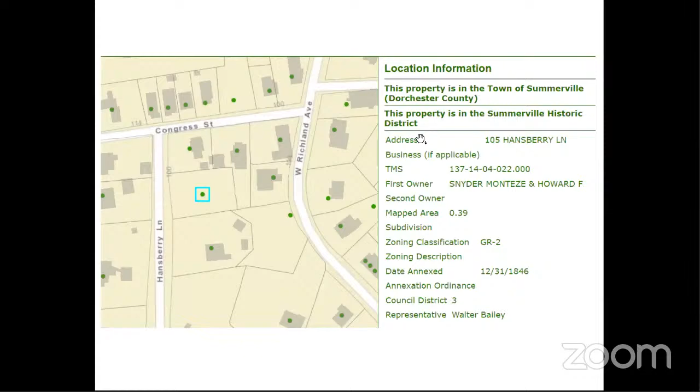Now, I did double check this. If you guys want to discuss this, you can. The person does not have to technically be here, but I know usually we forego doing that, so I'll leave that up to y'all. I'd say if they didn't show, let's skip it. I would concur. If they don't show, let's skip it.

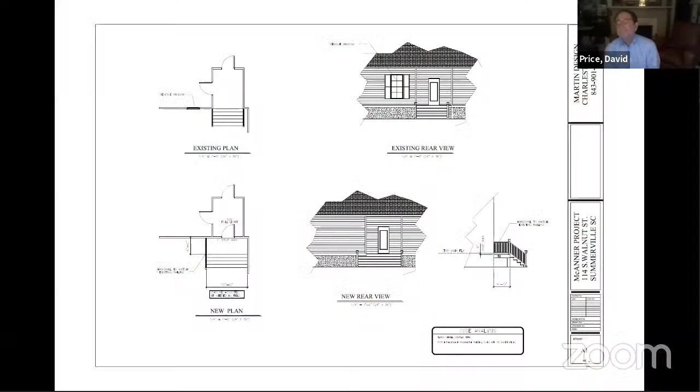Okay, I just put in my two cents worth. I do not think the plan that's been proposed is attractive, this elevation. Yeah. And this is a perfect example of a project that I get - not that this person did that, but people get very upset with me for not approving things like this. I try and explain, but you guys do a much better job than that.

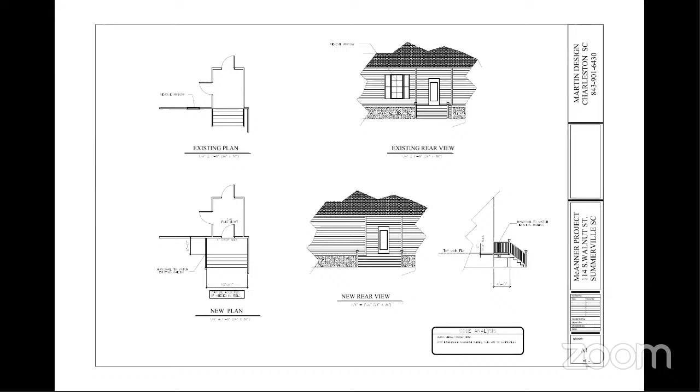Well then I don't have anything further. I didn't put this on the agenda, but obviously, you know, we lost Cecile and that's terrible, and her husband, and that's awful. I really feel for their family. I have talked to her daughter a little bit. She seems to be doing okay, but we do have the task to fill her seat now.

Beth Meservey, the clerk for the town, told me that she did have two applications, but I don't think they fit the requirements for the seat. So spread the word if you know of anyone. Becca, what are the requirements? I believe Cecile's spot was an at-large position, so they have to live within the town. Well, you know, Beth Huggins is moving back into town.

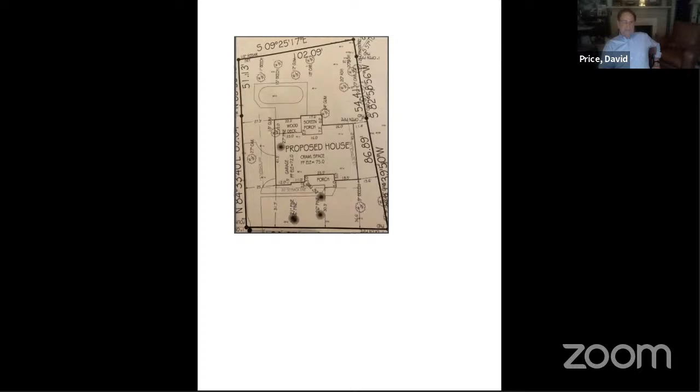Yes, I was surprised that we didn't get a cameo from her. I saw her in the background. Well, she was very adamant about not participating in any open discussion of that project. Gotcha. So, but I think while she was on the board, she did a very good job. And I would agree, I wouldn't have any problem having her back on again.

Yep, for sure. Does anybody want to take her out to dinner or something? Convince her. I already planted the seed with Jimmy, so. Okay, and he sounded like she would be open. Yeah, well, y'all just let me know.

I also know Robin Rogers, who's an interior designer, and we looked at her home for paint colors a while ago. But, you know, if Beth doesn't want to rejoin us or is unable to, it would be worth asking Robin. She lives in a historic home and has a lot of knowledge about our town.

Hey guys, I've got to run. Which house does she live in? Yeah, I got to run, I'm going to jump off. Y'all have a good night.

Yeah, all right, let's vote before we lose too many people. To adjourn, I make a motion we adjourn. Me too. All right.